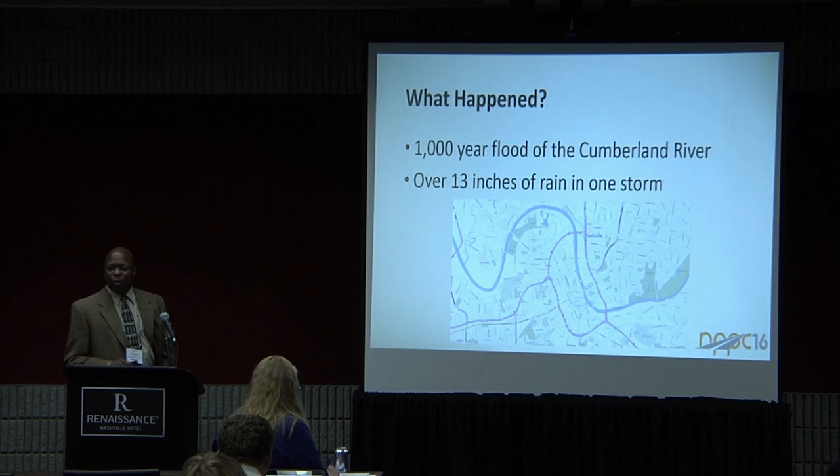In May of 2010, we had a flood, and most of your stormwater infrastructure is designed for a 100-year flood. We had what was called a 1,000-year flood, so it was off the charts. Over 13 inches of rain in one storm. And for all of you who were at the live demo yesterday, that was LP Field, that's Nissan Stadium now. So that entire area where we were yesterday looking at the demos was flooded, was underwater. All of 2nd Avenue, downtown Nashville, was underwater. So it was major damage. It got into the pumps out there by the field, and it caused all kind of damage.

I just happened to be in Memphis when it started raining, visiting my mother-in-law. It started raining, so I decided I needed to get back. And when we got right outside of Dickson, State Route 46, everything stopped. So there was not an interstate or a state route to allow you into Nashville, Tennessee. And so when we finally decided to get into Dickson, the entire state route was loaded with tractor-trailer trucks. All of the hotels were full. It was a catastrophe. It was major. So we finally made it home.

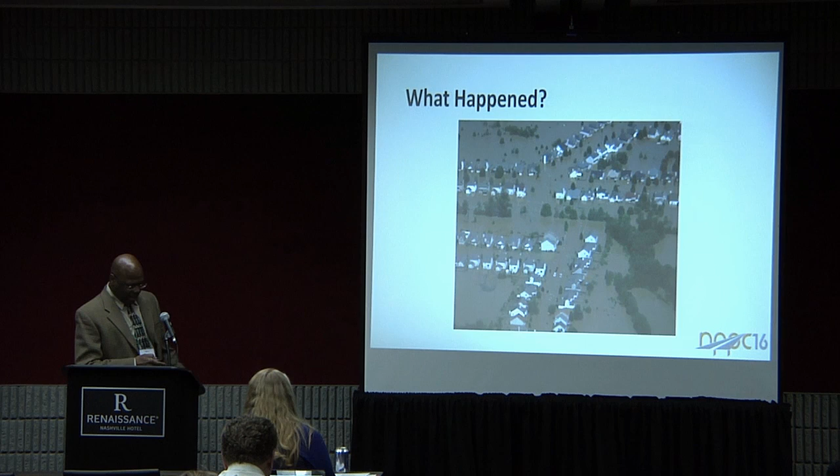And this is what we made it home to. I mean, the water just picked roads up and literally lifted them off the roadway. We've got pictures where it picked a house up and just set it in the middle of the road. And so this was the kind of damage, I mean, major damage. So we had to get busy.

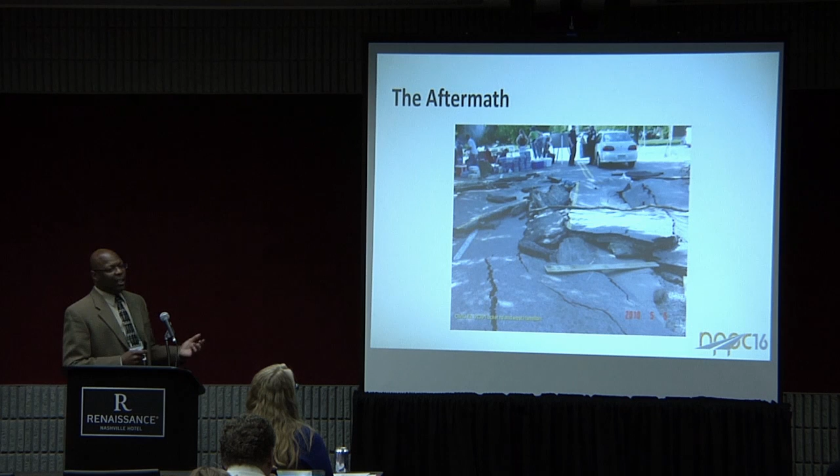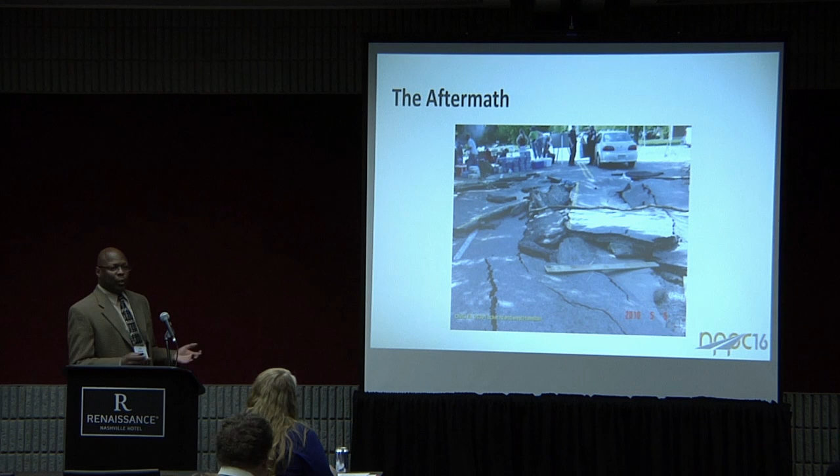And one of the first things we did in order to deal with FEMA is go out and find out where all the damage was. So we reported over 1,500 locations of damaged roads. Then the next thing was, from an emergency standpoint, we as Metro Public Works had to get the roads back open for emergency vehicles, for ambulances and for fire trucks. So that was the first task. We couldn't wait for FEMA. We had to get the roads back open. So that was the emergency response. We had to restore the roads to service, and then we had to develop a long-term response plan.

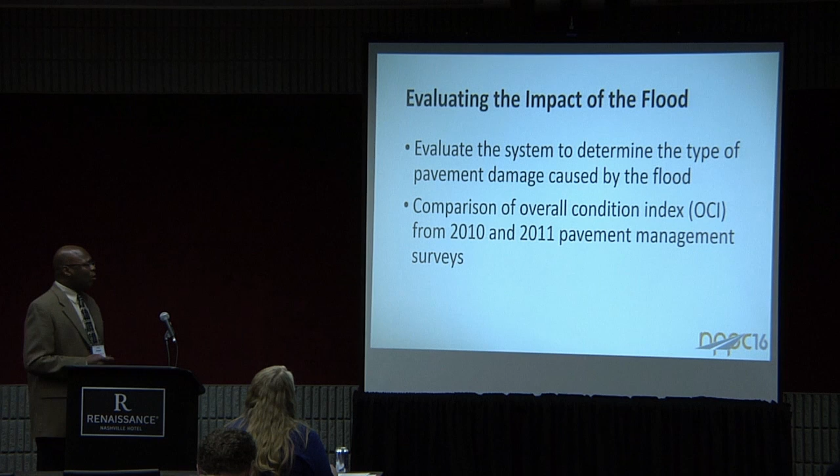Evaluating the impact of the flood: to evaluate the system to determine the types of pavement damage caused and how it affected our overall OCI from 2010 to 2011.

The way our pavement management system works and the way we evaluate it, we have a pavement condition index, which most of you know. We use the American Society for Testing and Materials D6433 to evaluate distresses. We look at IRI, and we also look at raveling. We look at raveling for pavement preservation consideration.

We collect pavement condition data on all of Davidson County. We collect half the county a year. So every 2 years, we have a full condition assessment of Nashville, Davidson County. We have images of every stitch of roadway in our county, every 20 feet. We do half the county every year, so every 2 years we have a complete assessment.

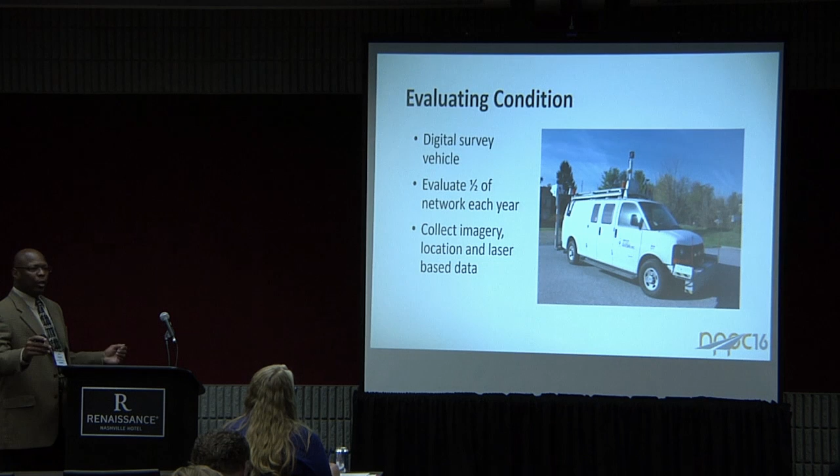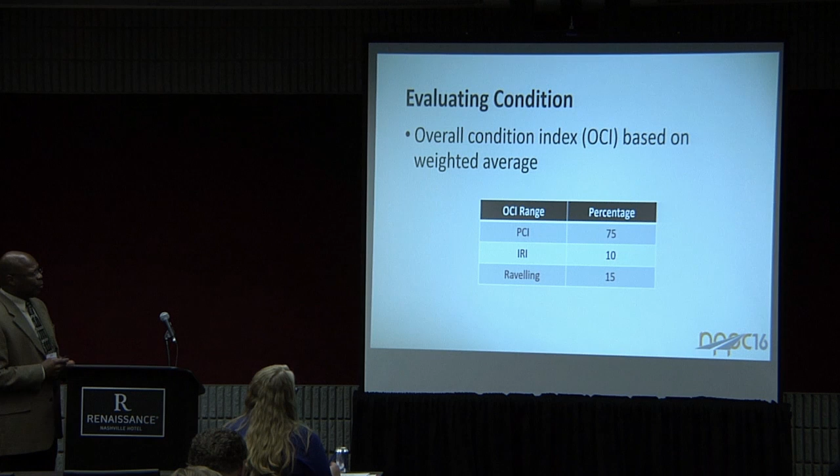The way we come up with our OCI is 75% of our pavement distress is calculated into the formula. We use 10% of our IRI, which is roughness, and we use 15% of raveling to come up with the overall condition index.

For bond ratings and for GASB 34, you have to have a standard, and our standard is we want our OCI to be greater than 70. So no more than 30% of our roads will ever be in a poor condition. We want to always maintain 70% of our roads above 70. So that's what we report to finance.

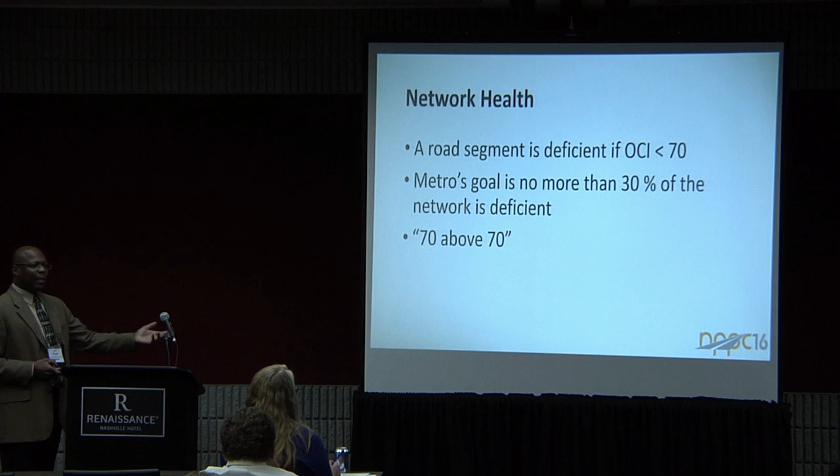So when those numbers change, when we get more than 30% poor and we start getting below 70, then the finance folks call me and say, Don, what are you going to do to get your roads back to where they need to be? And that's what happened when the flood hit.

In 2010, you can see the condition ratings. In 2011, you can see how it decreased. Those are the ones that are above 70. In 2010, 69.8, we were just 1 point below. In 2011, we were 52.8. So we lost a lot of ground after that flood. It was major.

What happened that caused our condition rating to drop? There was 100% increase in potholes on our infrastructure. And some people call them potholes. What I call it is the delamination of that top surface. The water totally peeled that top surface off with the running of the water, and it was everywhere.

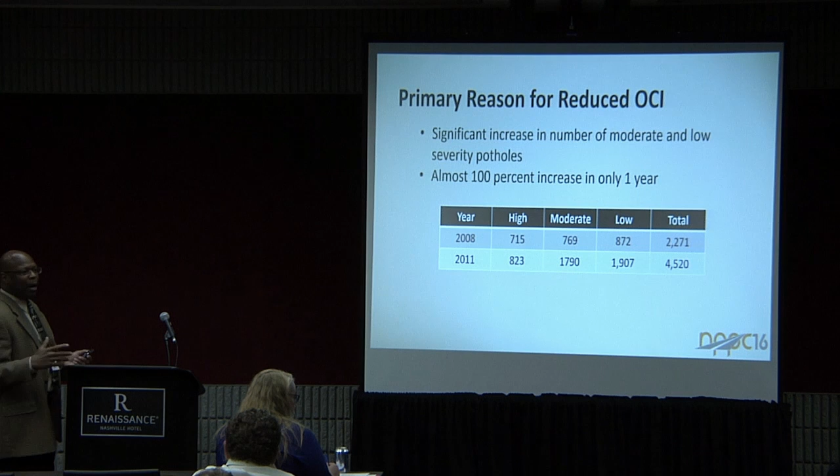And according to ASTM 6433, even that delamination is considered a pothole. So they were everywhere. It was 100% increase. And that shows you all the damaged locations. Every part of the county was affected.

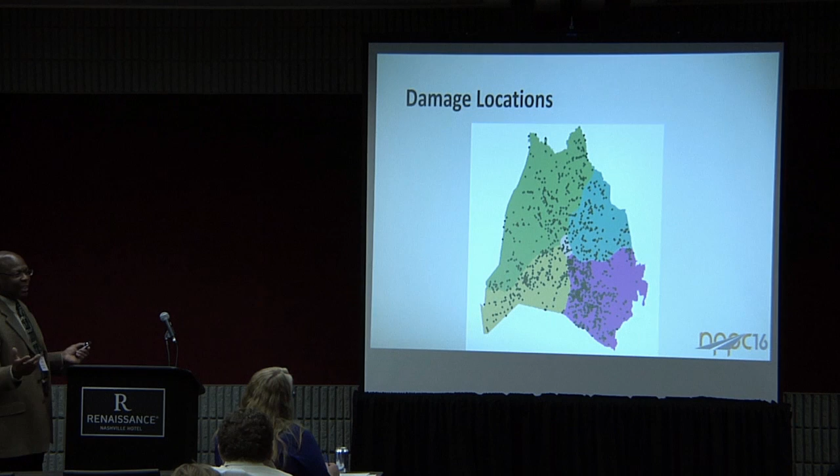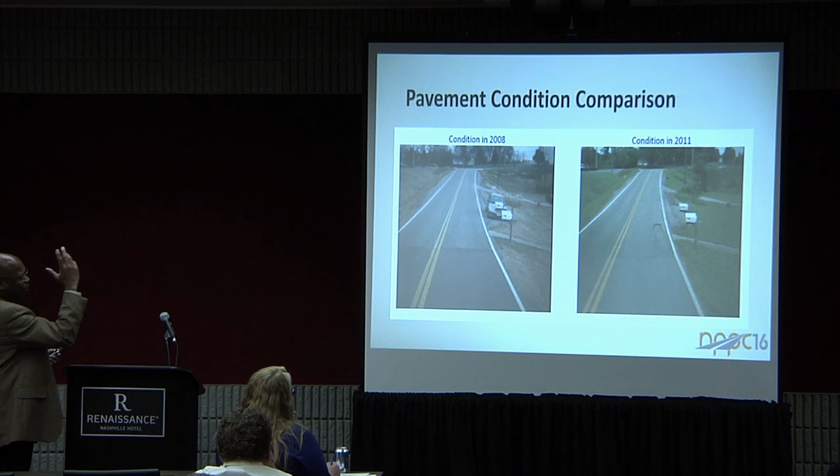And that kind of shows you pictures of what I'm talking about. That's 2008 image, and then 2011, you can see a pop out where the water had caused it. Same thing, 2008, 2011. So these potholes wreaked havoc on the condition of our roadway.

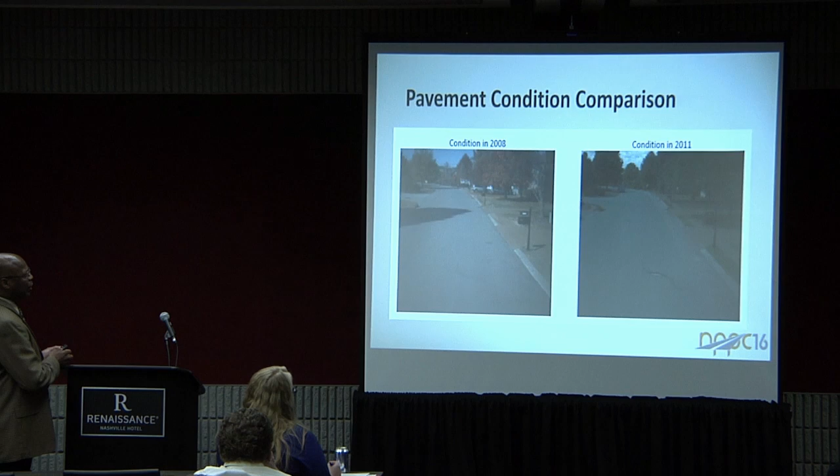This is a deduct curve. These are the curves that you see from ASTM 6433. And what you have here is the deduct values for a pothole. A pothole has the highest deduct value of any distress in the distress manual. If you look at the curve, you go over to like 1%, you go up to the deduct.

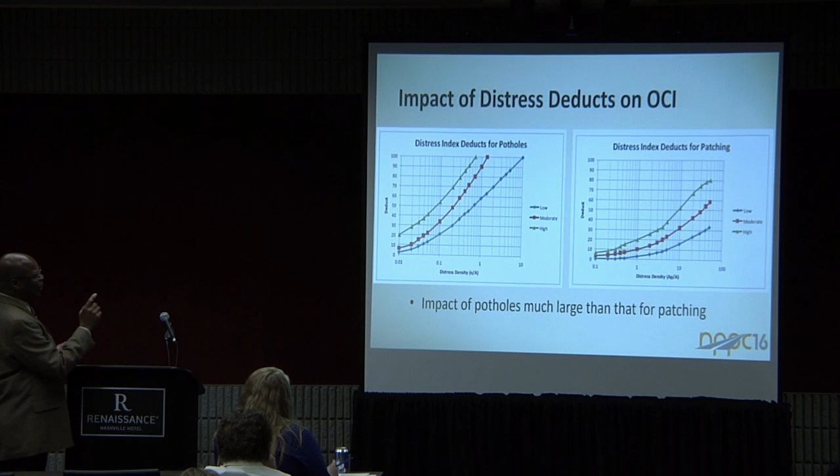If you got a brand new road and it's 100, and all of a sudden you start having potholes, say 1% pothole, you go up and you're deducting 50 points off of that 100. So your OCI has dropped below 70 just like that. And when you compare it to patching, you can see the curves are a lot lower. So there's not as much deduct value from your OCI than what a pothole causes. So that's what happened in a nutshell.

So what do we do now? I'm gonna turn it over to David Hine right here, and he's gonna get in a little bit more detail. Awesome. Thanks, Don. Oops, sorry, that's me.

So the major issue now is we've got a huge number of potholes in the thousands, literally everywhere. These are basically taking away from the condition rating of the roadways. We've got a requirement that they have to be less than 30% below the OCI of 70. Some of the roads had few, some of the roads had quite a few. And so the issue is, what do we do?

How can we do something, number one, to preserve what we still have? We don't want more distress happening and potholes getting larger. And how is this going to affect the overall network of the system? So we basically looked at what the overall condition index was in 2008 and beyond that. Ultimately, because of the potholes, we got this significant decrease in that OCI, and we need to do something about it.

So if you look at particular locations here, the values of the network, you've got 95s in 08, and all of a sudden they drop to 47. And again, this is because of the potholes and the severity of those potholes. And we looked at what can we do about this. So you can go fill it.

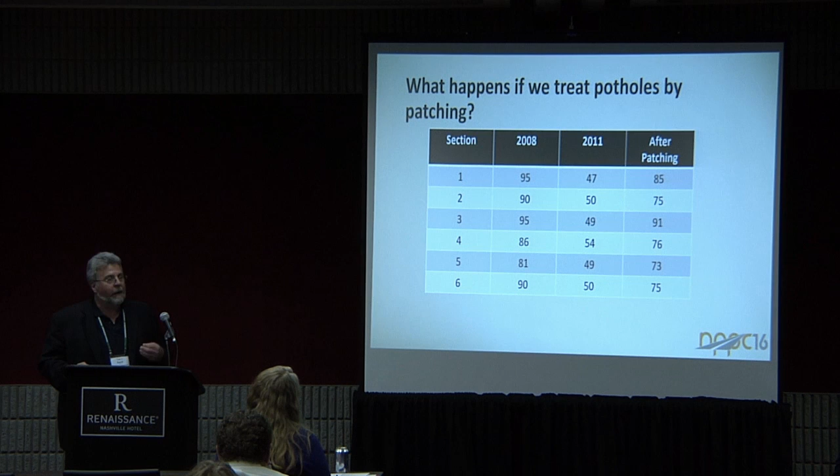It's not a long-term solution. We're looking for something else that would be a little bit longer term. Looked at different patching methods to improve it, and that's what we basically implemented to help raise the overall condition index from the low values that we had in different locations.

So the process basically is to use what's called an infrared patching technique. Many of these potholes were literally, as Don mentioned, surface delaminations, and so if we can get something that's going to bring it back to a reasonably decent patch, not just dumping some cold mix or something into it, it was going to help increase the condition ratings of the system.

So ultimately what happened was, and I'll show you in a second what was physically done, but the implementation of this process, after looking at others, we could go out and say mill and overlay some areas that had quite a few of them, but then the money wasn't going to go very far. So we don't have all of a sudden big gobs of money to spend. We want to use whatever we had in the most efficient fashion.

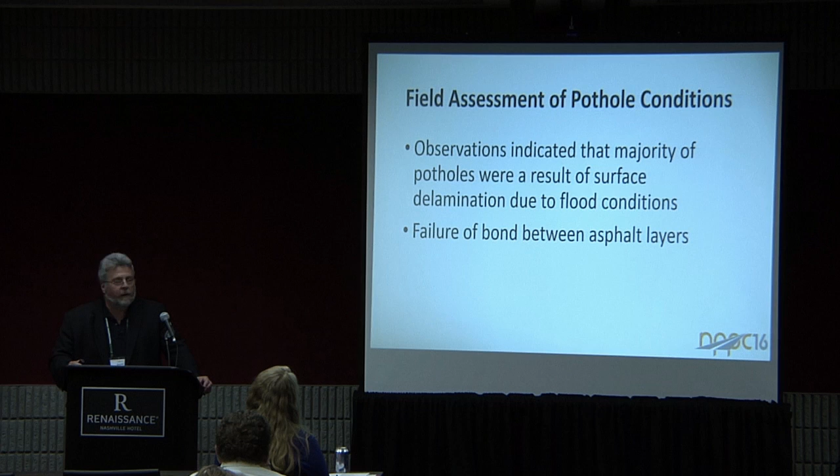So ultimately, as Don mentioned, a lot of these potholes were really delaminations. Some of them had structural issues with them as well, and the technique wasn't used for all of them, but for the most case, it was a failure of the bond between the individual layers. The water got in between them. It basically helped debond the surface layer, and we ended up with this delamination / pothole, as was identified by the Pavement Condition Index. So they literally went out and you saw the map there. Everything was identified.

They basically implemented a system by which the county went out and inspected them all. They developed a phone app basically to do this. Their inspectors went out, took a picture of the pothole before the repairs were done, identified the location, GPS right to a map. The stuff from the GIS map was then dumped down to an Excel spreadsheet. The spreadsheet was then given to crews that went out and basically identified the locations, back up one step.

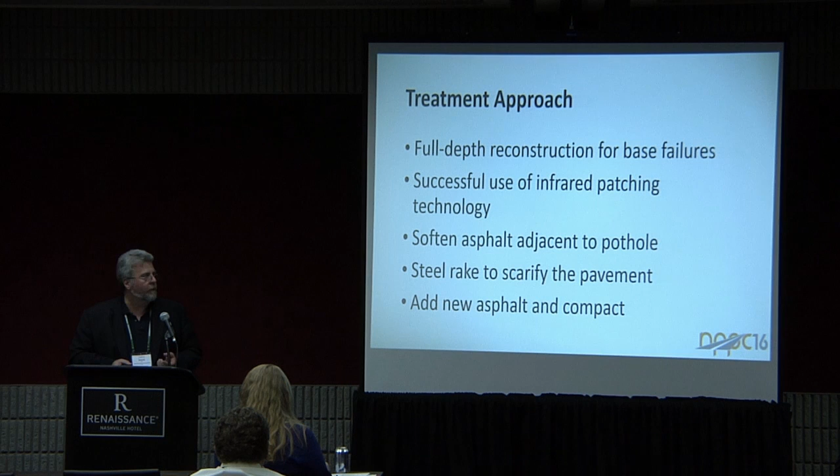From that spreadsheet, their inspectors went out and actually looked at it, determined whether or not this infrared patching technique would be suitable for it, or whether it was a base failure, dig out the whole area and replace it. They then physically marked the locations on the roadway. That data was then, again, back to the GIS map, sent to an Excel spreadsheet, sent to the guys who were doing the physical work, and they went out and did the work.

Once they did the work, a photograph of the completed patch went back again to the GIS system so they know that the work was done, and they were basically paid on a square footage basis of the area that was marked out. So you couldn't have a contractor going out there saying, well, 4x4 is not right, it should be 6x6 or something like that. The idea is to do as many of these as you could with the money that you had available, such that we're going to have our maximum increase in our overall condition index for the system.

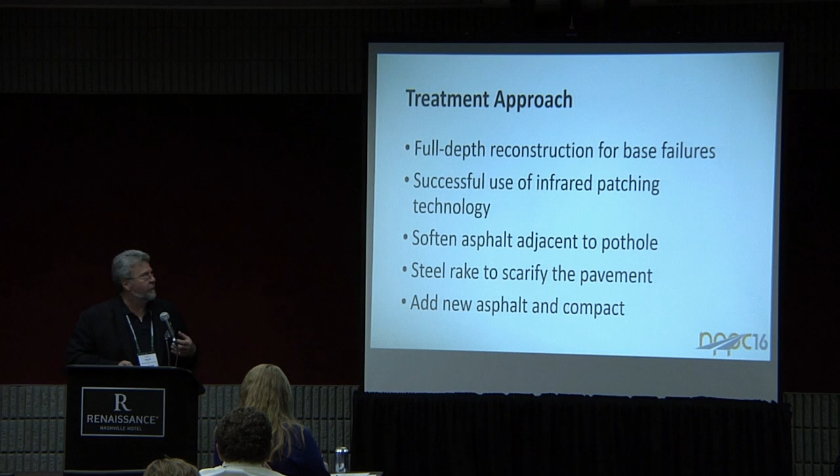So the basic technology was infrared patching. Going out there, heating up the existing asphalt. It's like a mini hot in-place recycling type deal. Soften the asphalt around it, rake it, add some new material to it, and compact it. So there's your identification of a delamination / pothole. You can see that there's been a bit of cold mix put in. Some of that was done just for safety reasons, but ultimately that was the area that was marked out.

You've got the infrared equipment coming behind. There were, correct me if I'm wrong, Don, three crews out there doing this. So there were three crews doing this almost full time. For how long, roughly? Yeah. Okay. So three crews, that's a great contract, guys, if you're out there as a contractor. So anyway, there were lots of things to do.

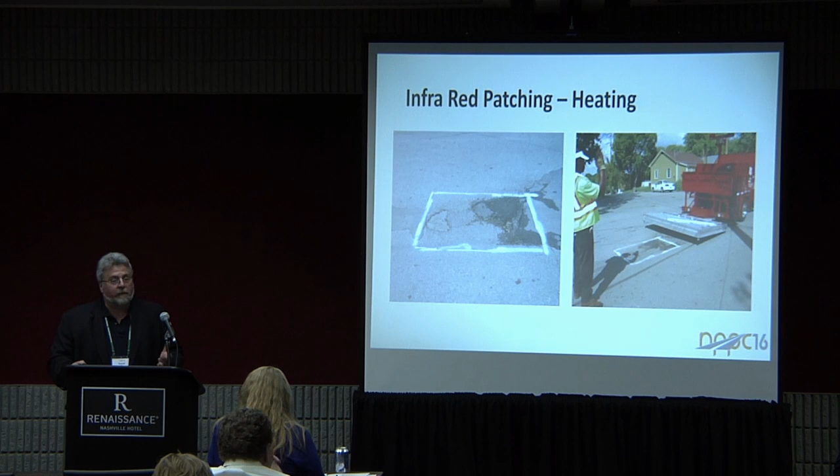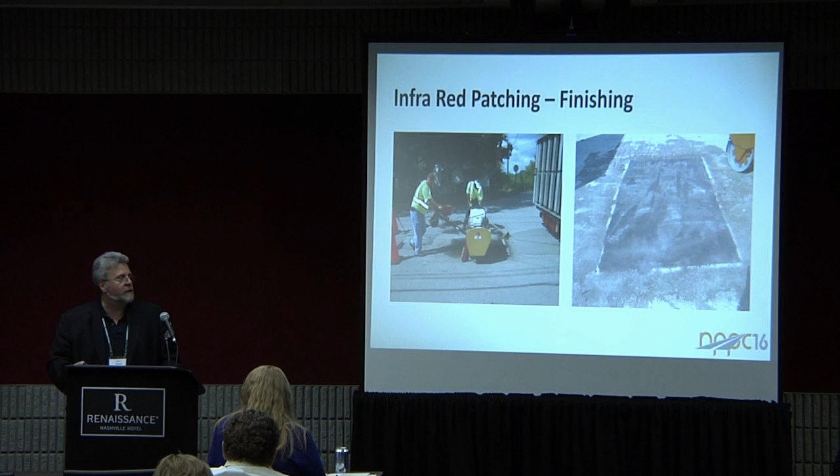Well, ultimately, it was to fix the delamination to increase the OCI. So this is not a totally permanent fix. This is at least something that's going to help get those numbers up as fast as possible so that they could be compliant with their bond requirements and things like that.

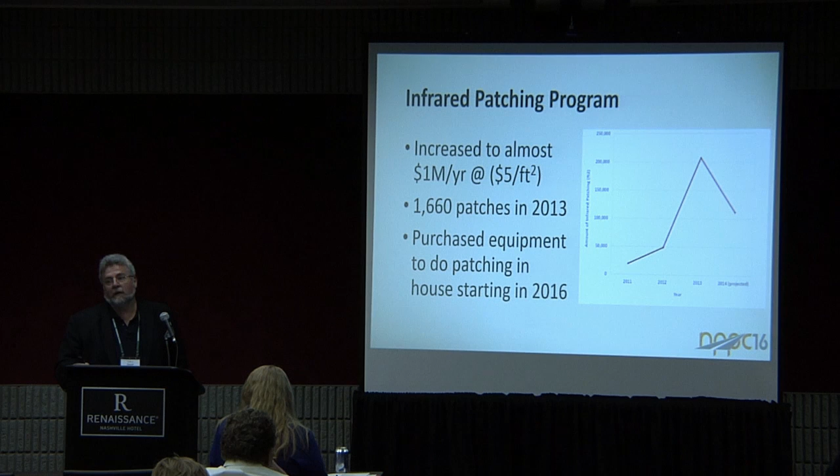So the program increased very rapidly. It was about $5 a square foot to do this. About $1 million a year was done in infrared patching. 1,660 patches done in 2013, so this is quite a few. How many a day can one of these crews do, roughly?

30 to 40 a day. That's pretty decent production to get that done. So bottom line is that they had contracted this work out for the first little while, and in 2016, this year is the first year the county actually purchased their own equipment, are using their own staff to go out and do this work. So they got trained and taught how to do this.

Not all of these are going to last a huge amount of time. Some of them still got overlaid as a part of the regular resurfacing program. They were all selected based on the probability of them succeeding, of course. And so it has been an effective way of literally preserving what they had until they can get to the point where they can do something a little bit longer. So it's definitely a pavement preservation technique.

Ultimately, this was a huge economic impact that wasn't expected. The county does great work in doing pavement preservation, and Don's like a bulldog out there trying different things and trying to find out the best thing that can be done for the road network. And as he mentioned, it's an extremely large one at 5,800 lane miles. So this was a huge economic impact to the group. The number of potholes increased tremendously, and some still continued to happen after the flood, so there were some issues with that as well. Ultimately, it's something to help preserve it until such time as more money can be spent on it.